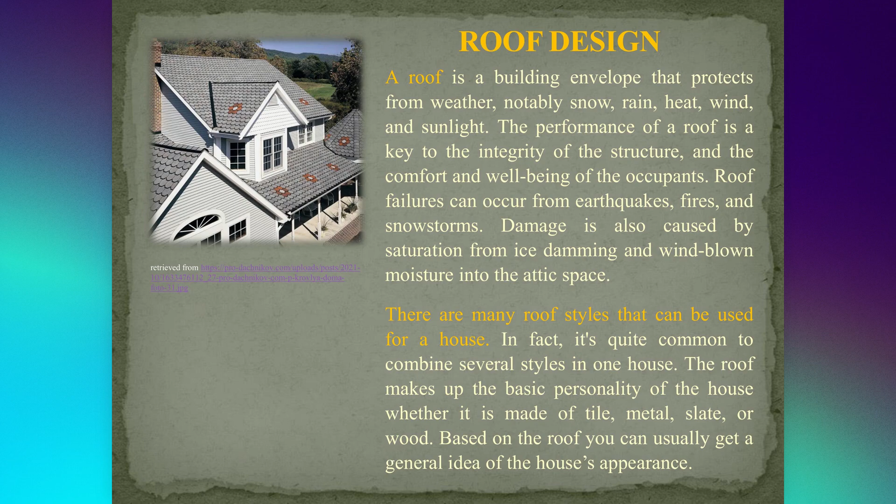The characteristics of a roof depend on the purpose of the building that the roof covers, the available roofing materials, the local traditions of construction, and wider concepts of architectural design and practice, and may also be governed by local or national legislation. In most countries, a roof protects primarily against rain.

A veranda may be roofed with material that protects against sunlight but admits the other elements. The roof of a garden conservatory protects plants from cold, wind, and rain but admits light.

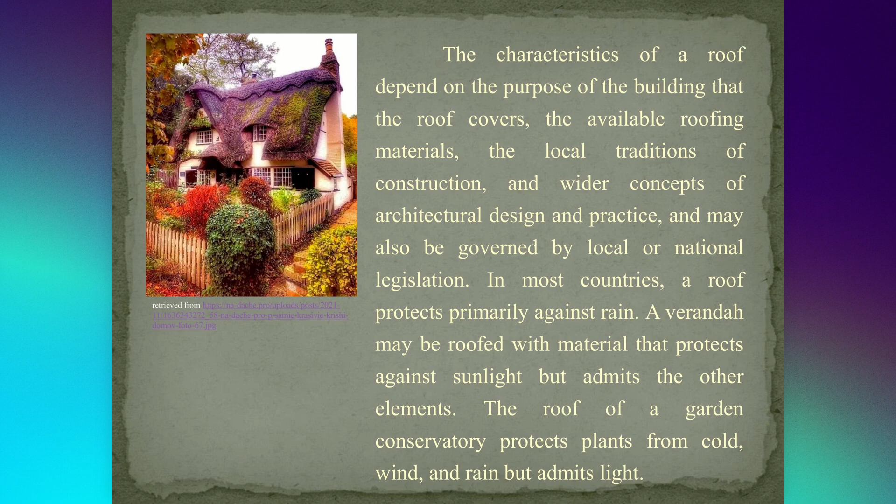Design elements. The elements of a roof design are the material, the construction, the durability. The material of a roof may range from banana leaves, wheat straw, or seagrass to laminated glass, copper, aluminum sheeting, and precast concrete. In many parts of the world, ceramic tiles have been the predominant roofing material for centuries.

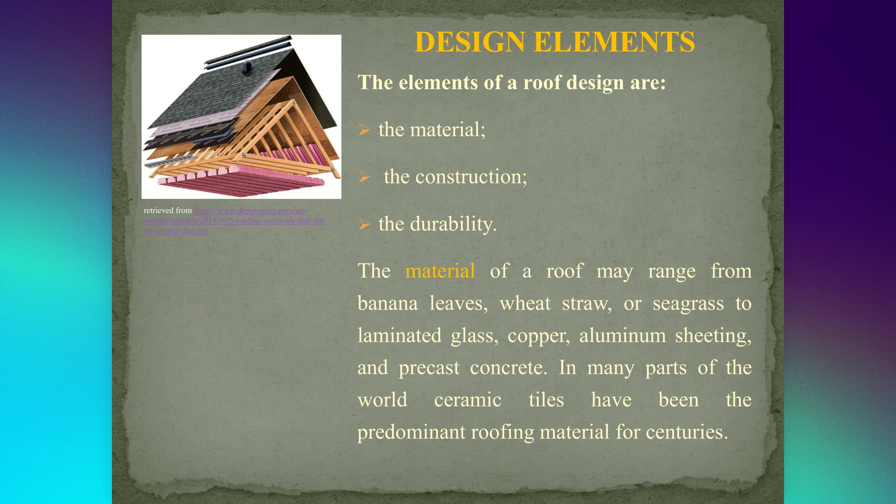The construction of a roof is determined by its method of support and whether the roof is pitched or not. The pitch is the angle at which the roof rises from its lowest to the highest point. Most domestic architecture, except in very dry regions, has sloped or pitched roofs.

Although modern construction elements such as drain pipes may remove the need for pitch, roofs are pitched for reasons of tradition and aesthetics. So a pitch partly depends upon stylistic factors and is partially connected with practical function.

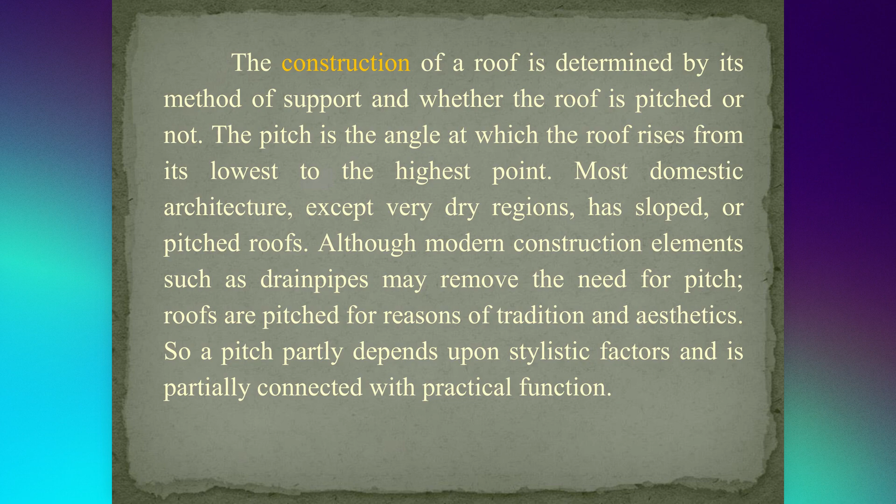Some types of roofing, for example thatch roofs, require a steep pitch in order to be waterproof and durable. Other types of roofing, for example pan-tile roofs, are unstable on a steeply pitched roof but provide excellent weather protection at a relatively low angle.

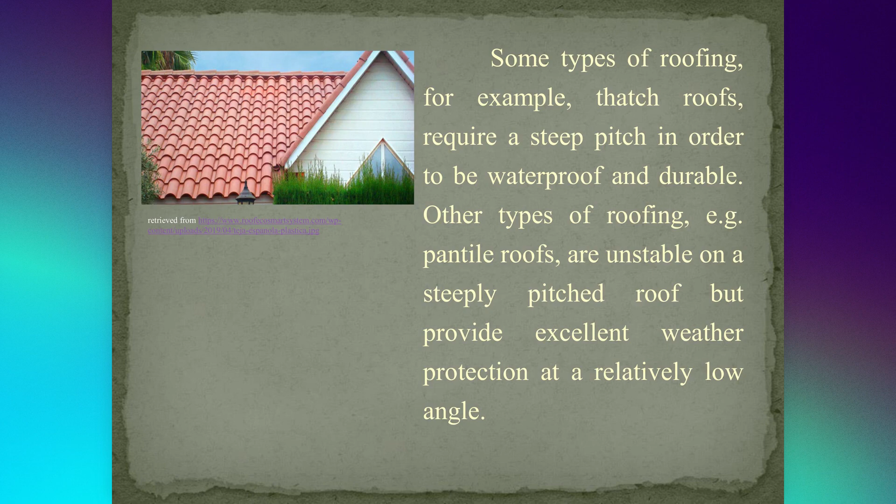In regions where there is little rain, a flat roof with a slight runoff provides adequate protection against occasional heavy rain. Drain pipes also remove the need for a sloping roof.

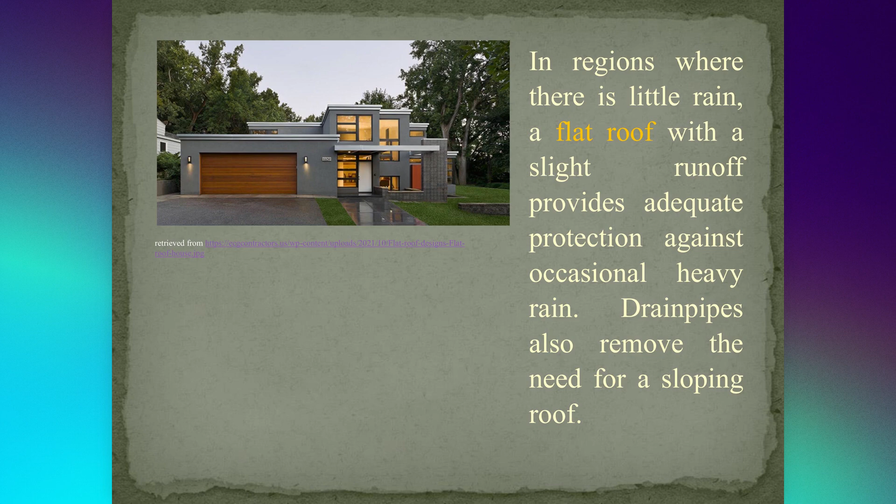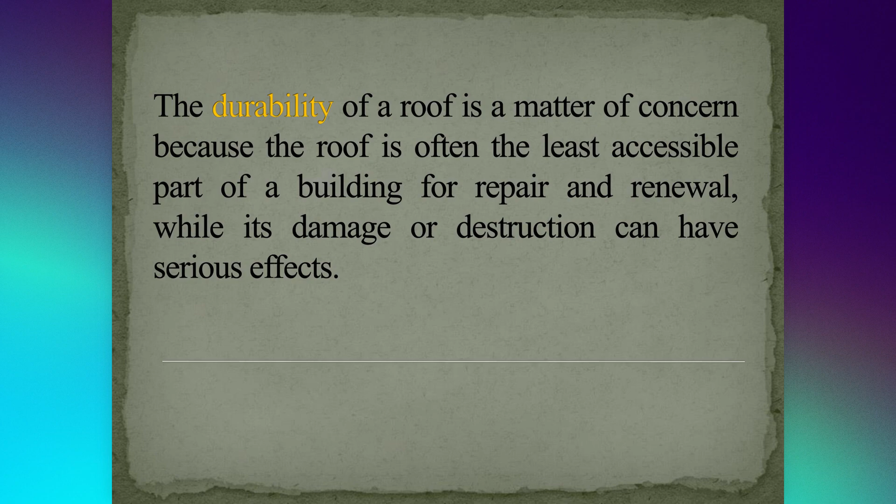The durability of a roof is a matter of concern because the roof is often the least accessible part of a building for repair and renewal, while its damage or destruction can have serious effects.

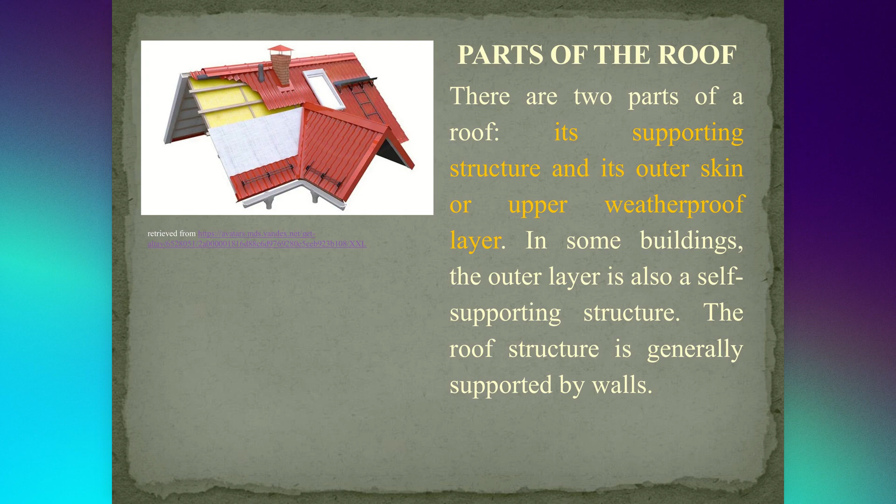Roof styles. Throughout history, and especially throughout the past couple of hundred years, the styles of roofs vary from area to area. There are different designs, styles, and shapes of roofs. They should correspond to the structure to be covered.

Some of the most primary needs that a structure demands from a roof are protection from the weather, general design suitability with the existing structure, and placing the internal elements such as piping, electrical wiring, ventilation, and insulation.

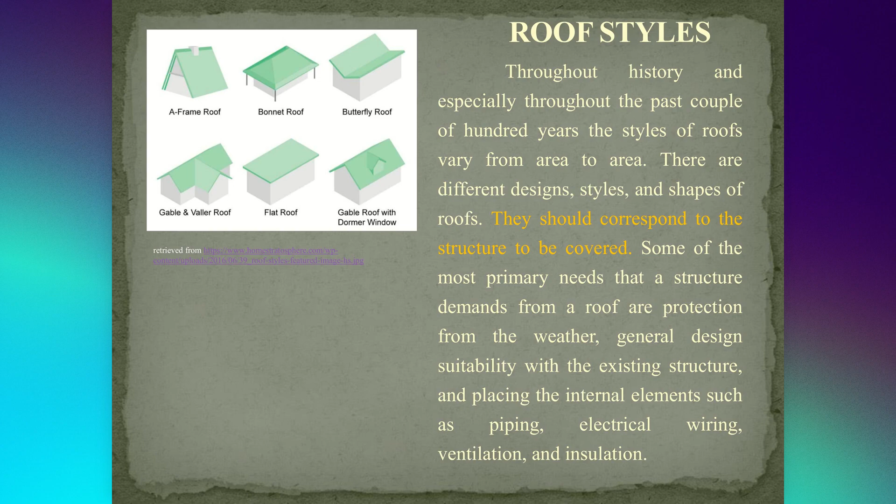Shape of roofs. The shape of roofs differs greatly from region to region. The main factors which influence the shape of roofs are the climate and the materials available for roof structure and the outer covering. The basic shapes of roofs are flat, gable, hip or hipped, arched, and domed.

There are many variations of these types. Roofs constructed of flat sections that are sloped are referred to as pitched roofs, generally if the angle exceeds 10 degrees. Pitched roofs, including gabled and hipped roofs, make up the greatest number of domestic roofs. Some roofs follow organic shapes either by architecture or because of a flexible material used in the construction.

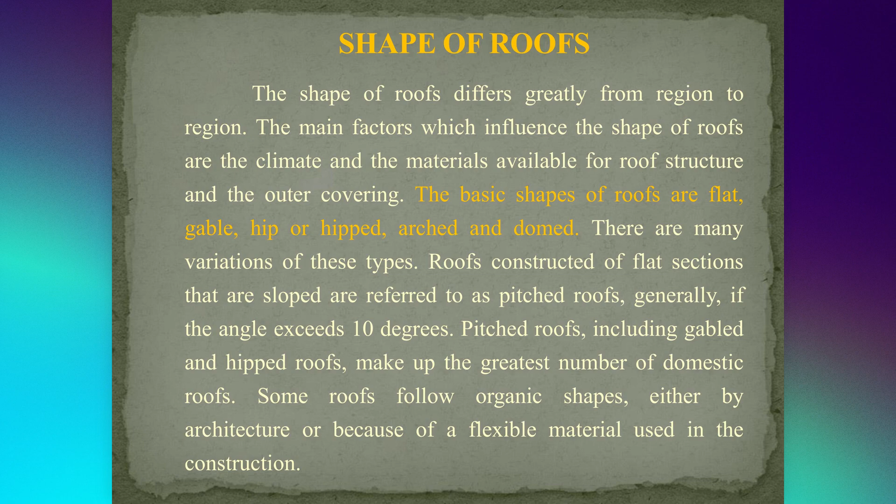Flat roof. Flat roofs are common, especially for commercial buildings. Flat roofs are definitely the simplest roofs to build because they have a little pitch. Waterproofing is very important for flat roofs.

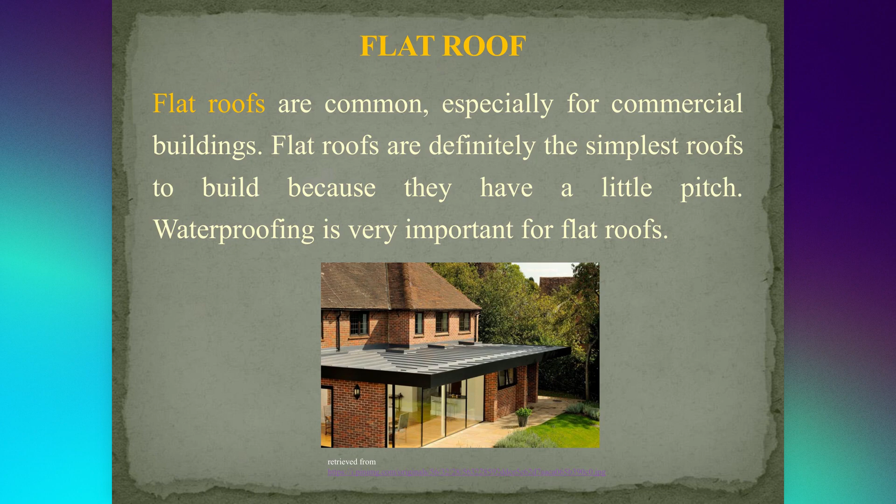Shed roof. A shed roof is basically a flat roof but has more pitch. It is frequently used for additions to houses.

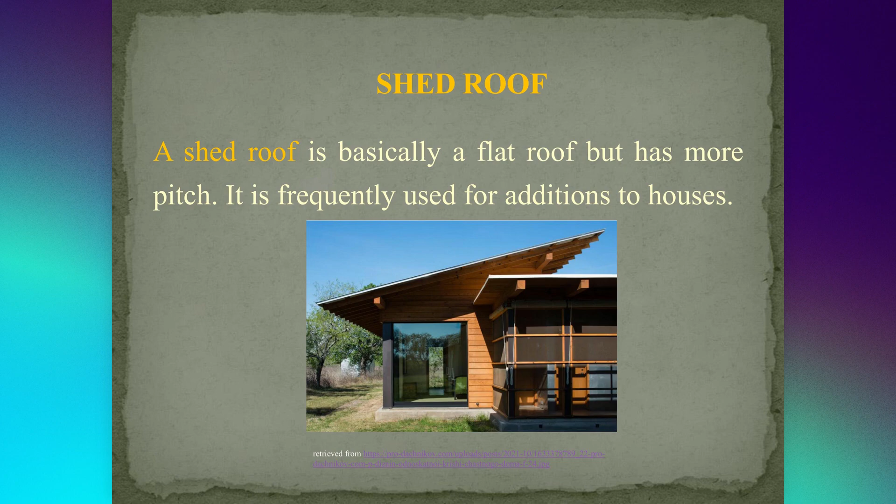Gable roof. Gable roof design is one of the more simple styles of roofs. The gable roof style looks like an inverted upside-down V. Gable roofs are not ideal for areas with high wind because they can easily catch the wind like a sail would. Gabled roofs also offer larger space for an attic.

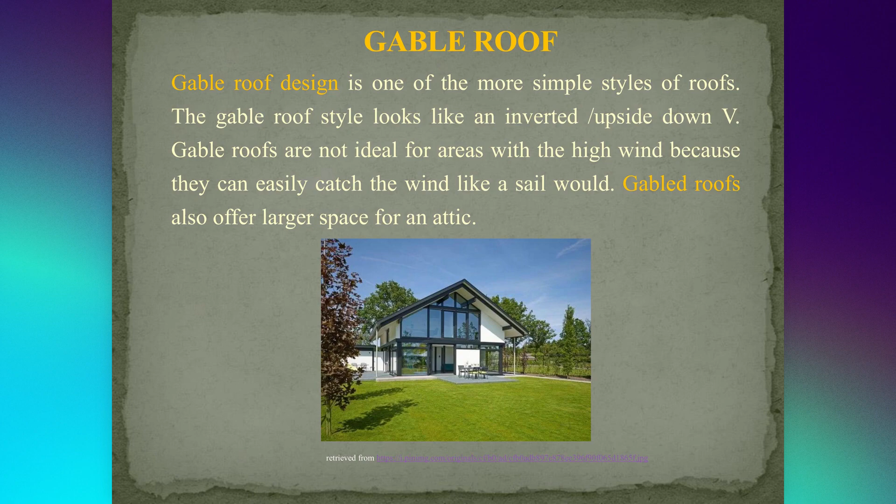Hip or hipped roof. The hipped roof is a widespread and popular type of roof. It creates a solid and attractive profile when combined with a low and stretched structure. A hipped roof has four sides and a gentle slope.

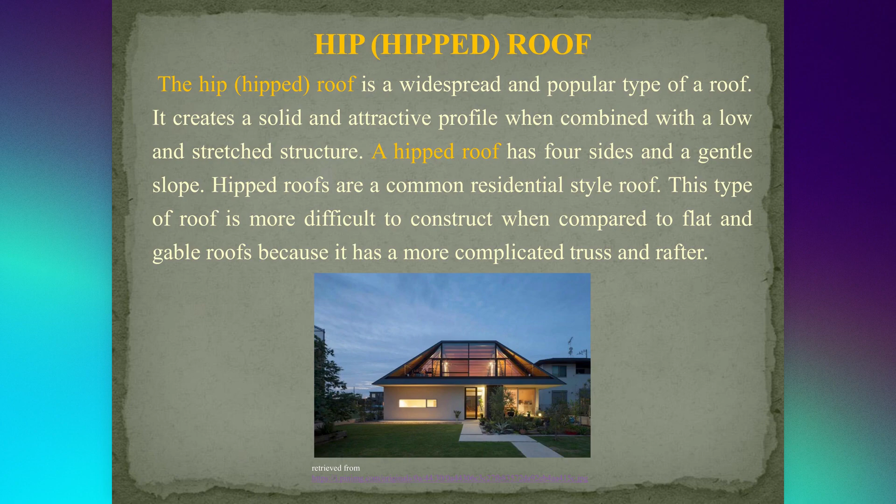Hipped roofs are a common residential style roof. This type of roof is more difficult to construct when compared to flat and gable roofs because it has a more complicated truss and rafter.

Mansard roof. A mansard roof is a French design and is more difficult to construct than a hipped or a gable roof. A mansard roof is a historic variation of a hipped roof. These types of roofs are unusual but offer plenty of interior space for an attic.

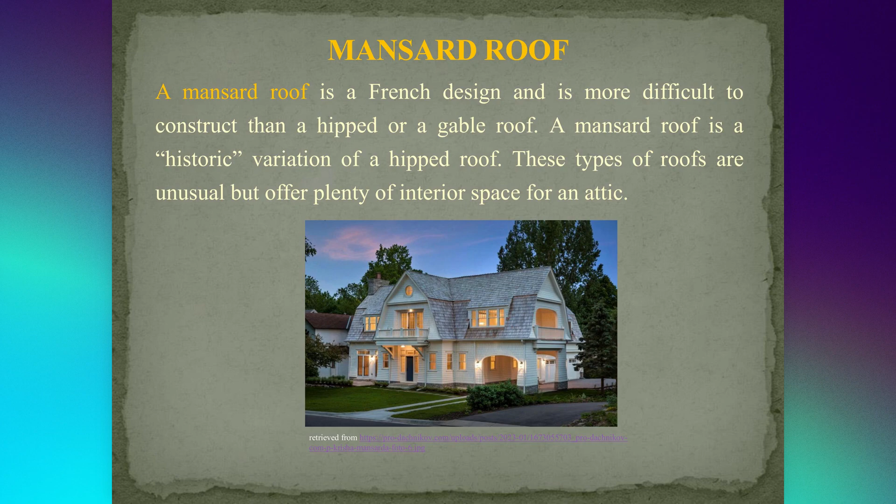A-frame roof. This type of roof is very popular for churches, cottages, homes, and other structures. The roof acts as both the roof and the walls of a structure.

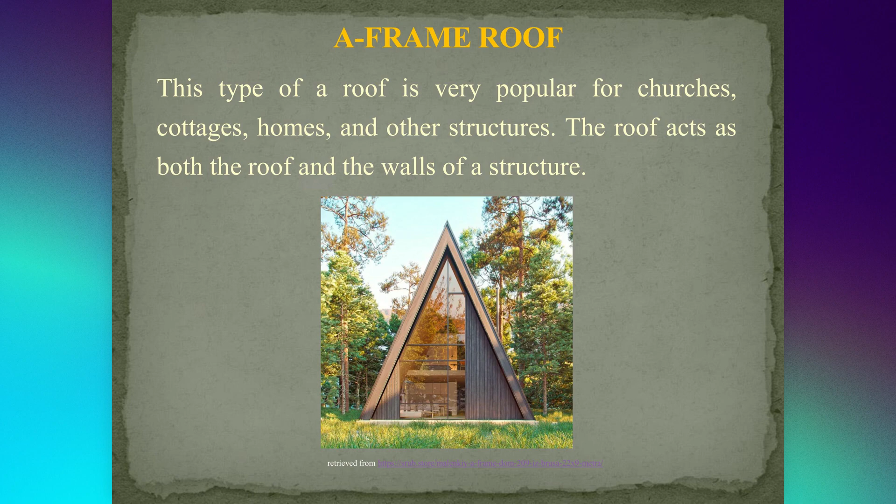Shed roof. A shed roof is similar to a flat roof but uses a steeper pitch, which allows for better drainage. Shed roofs offer lots of design options.

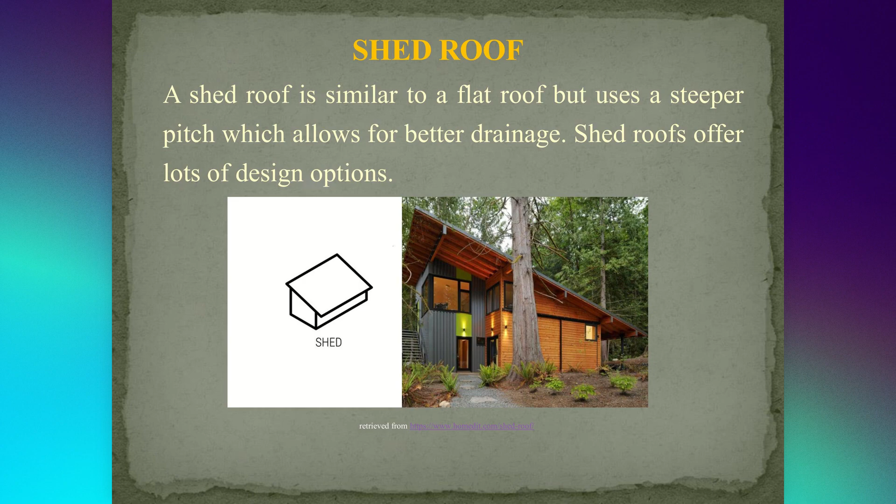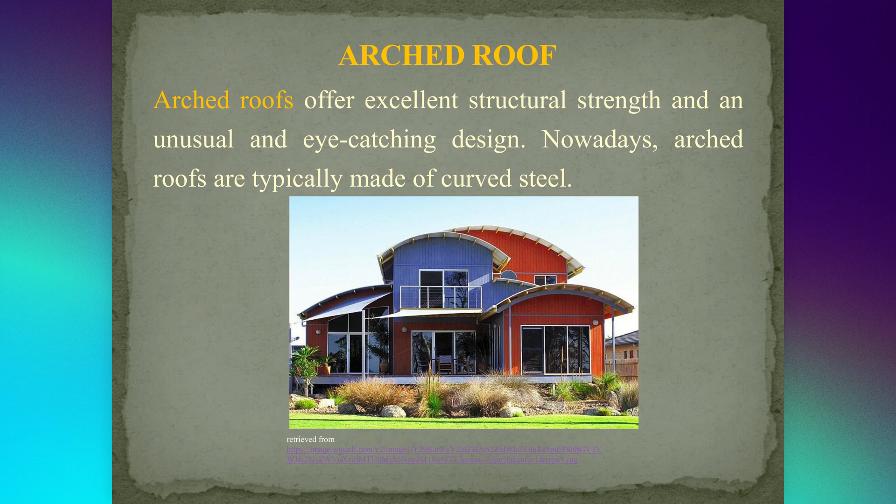Arched roof. Arched roofs offer excellent structural strength and an unusual and eye-catching design. Nowadays, arched roofs are typically made of curved steel.

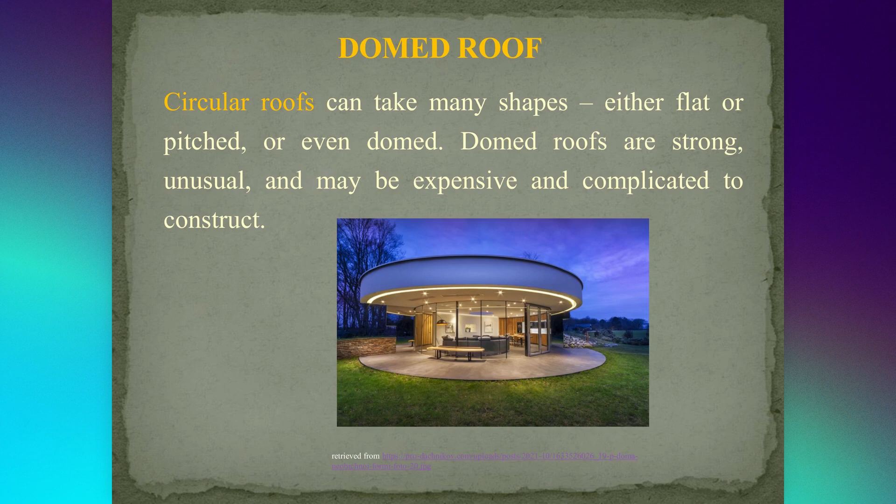Domed roof. Circular roofs can take many shapes, either flat or pitched or even domed. Domed roofs are strong, unusual, and may be expensive and complicated to construct.

Sawtooth roof. Sawtooth roofs were traditionally an industrial warehouse type of roof. They are now increasingly popular in houses, thanks to the amount of daylight they allow.

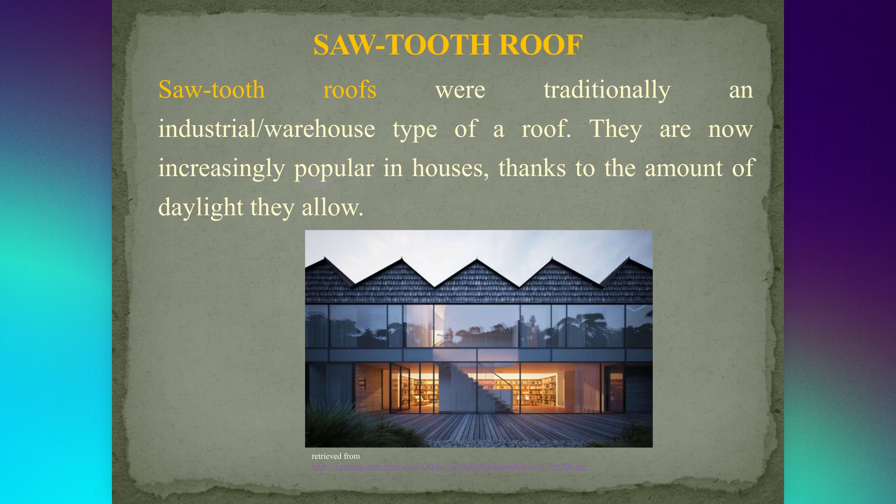Curved roof. Curved roofs, most commonly made of steel in modern designs, offer the opportunity to add organic curves and a softer, rounder look to the house.